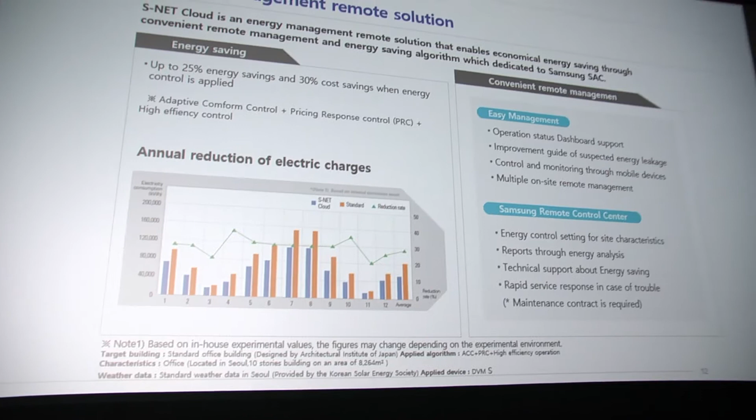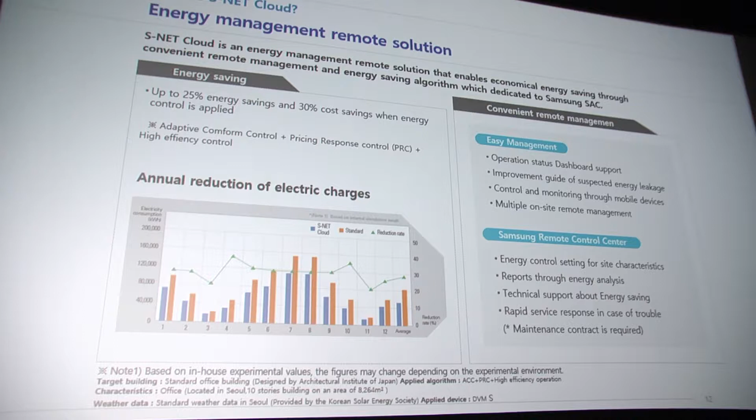What is S-NET Cloud? S-NET Cloud is an energy management remote solution. So you can connect all your Samsung equipment to the system and control the energy they are consuming and monitor it. It can give you up to 25 percent energy savings or 30% cost savings through a whole year. It's an easy management system. You have a simple dashboard which you can operate by just clicking through very easily.

It gives you an improvement guide for where you have energy leakage in your buildings, or gives you control and monitoring by your mobile phone all over the world for your site. And you can put multiple sites in the same system. For instance, if you have a franchise organization or different office buildings, you can put them all in one system. Sorry.

The system will also give you an energy report monthly with your energy consumption through all day, which building is the most energy efficient, which building has some work to do. They will give it to you each month. Also, you will have technical support from our engineers on sites where you can save energy in your buildings.

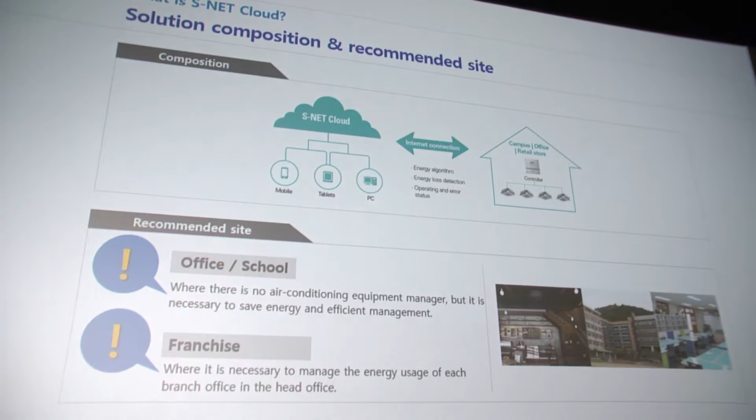What's the purpose? You connect your Samsung system to the internet, and it will directly send the data to S-NET Cloud, and you can reach it through your mobile phone, tablet, or PC at home, at the office, or in other locations. Our main focus is on offices and schools, and franchise organizations like Starbucks or H&M, Zara, those kind of shops. The features of our product.

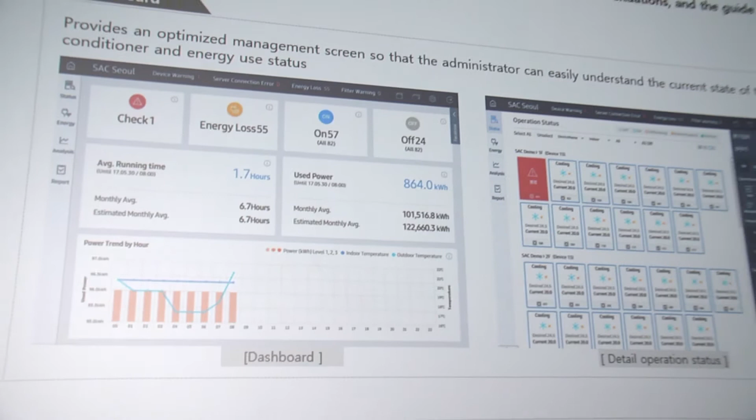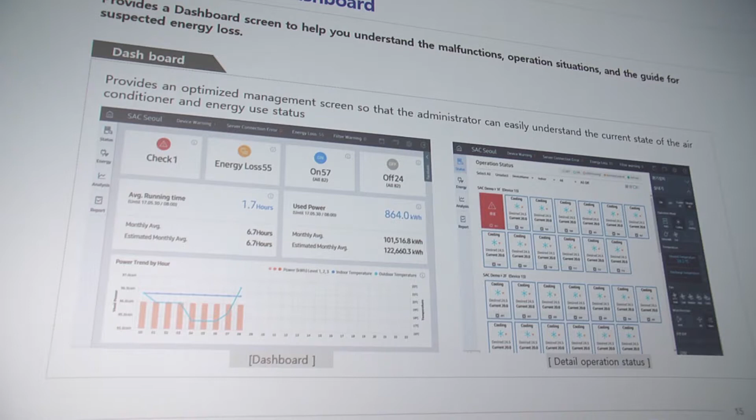This is the dashboard you will see in the remote system. It will give you a quick view where you have to check one of the indoor units which has some problems or a malfunction or failure. It will also give you a view of which indoor units will have energy losses. For instance, it will run for a very long time. Doors and windows will open constantly, and you can check that as well.

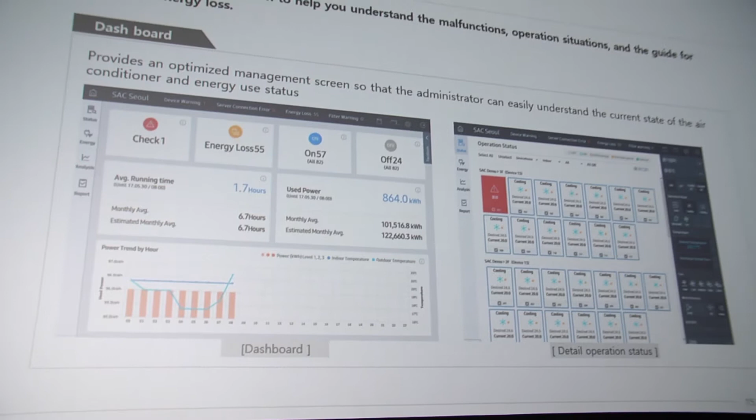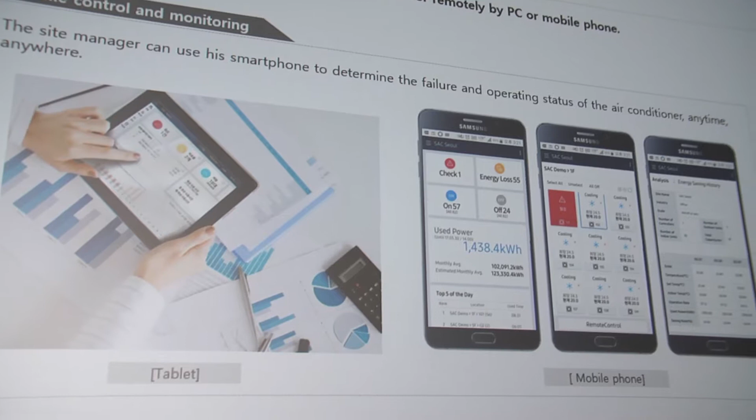You can also see how many units are operating and how many units are offline, so they're not working, they have no demand for them. It just gives you a simple overview, and if you go further on in the program, you will see every indoor unit which is running or is heating, cooling, or in which mode they are. You can also do this by a mobile phone. Probably everybody has got a smartphone these days, and we are providing the system to be working on your smartphone or tablet, and you can check the data from your home if you want to.

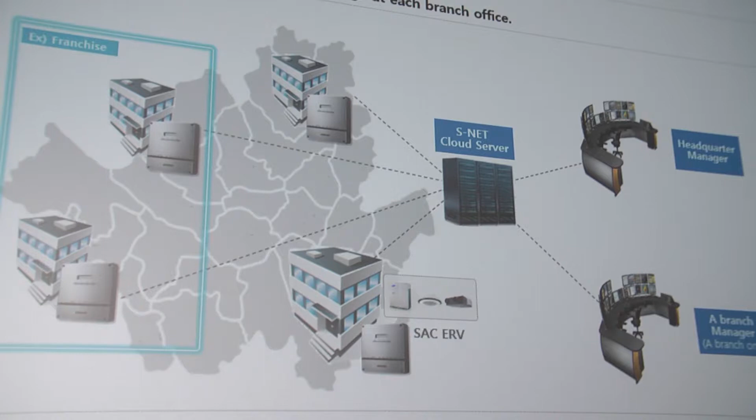The main profit of the system is that you can remotely access every site you have. So you don't have to fly to other countries or other cities to see your system online and how they are performing. And you can adjust from just one site. So if you have a building in 3 different countries and headquarters in another city, you can manage the systems from your headquarters just one click away from your computer or laptop or mobile phone.

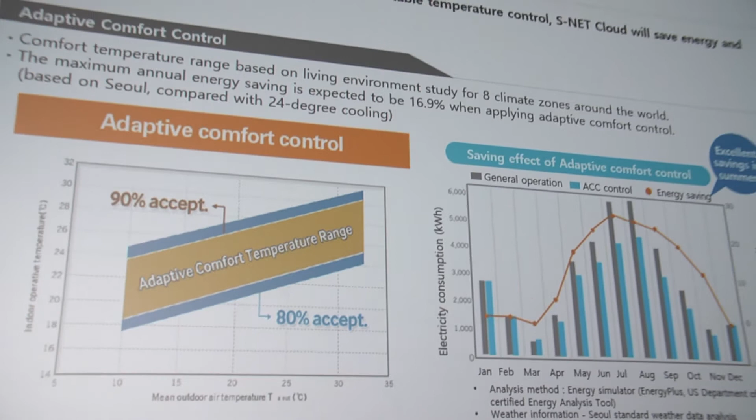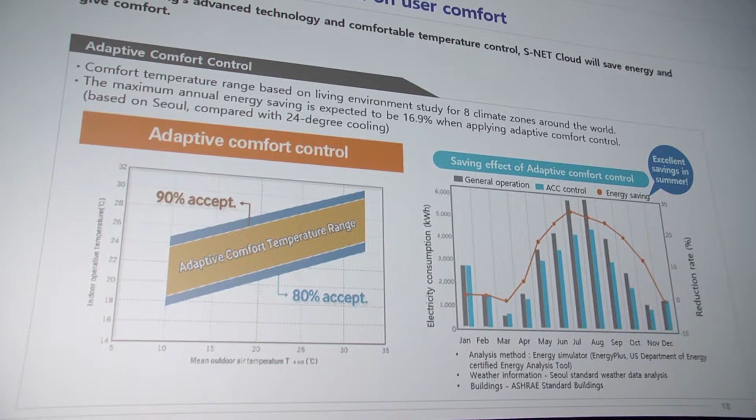The energy savings are based on studies we've done in 8 different climate zones through the world. These comfort zones: when you have a certain outdoor temperature, you have a certain indoor comfort climate in your office building. You can set that up in the system as well to maintain a comfortable climate for your customers, employees, school children, and so on. With this system, you can also provide those energy savings through all the year. In January, February, you don't save a lot, but in the summertime, you can save up to 25%.

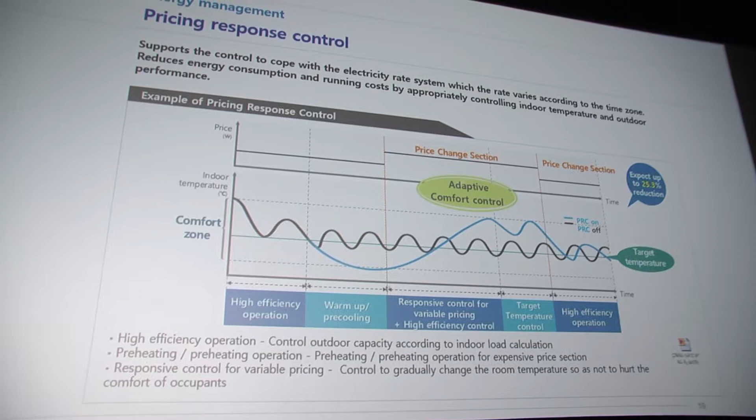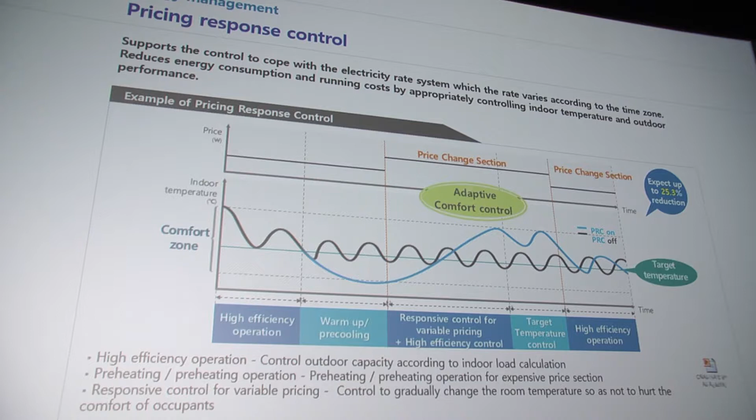This adaptive comfort control, we call it, will have a schedule that will preheat or pre-cool the building prior to working hours or visiting hours, and just let it flow gently through a certain temperature, and then just cool a little bit or heat it a little bit during those office hours, and then let it cool down again at the end of the day.

So for instance, if your shop or building will open at 8 o'clock, we will start preheating or pre-cooling at 7 o'clock in the morning to get a comfortable climate for your employees, customers, and then let the climate rise a little bit. We have a 2 or 3 degree bandwidth to control, and probably around 2 o'clock it will be the warmest time period in the building. Then we will cool it down a little bit, 1 degree, and let it go up to that 1 degree as well, and at the end we will cool down the building, so it will start nice and evenly the next day.

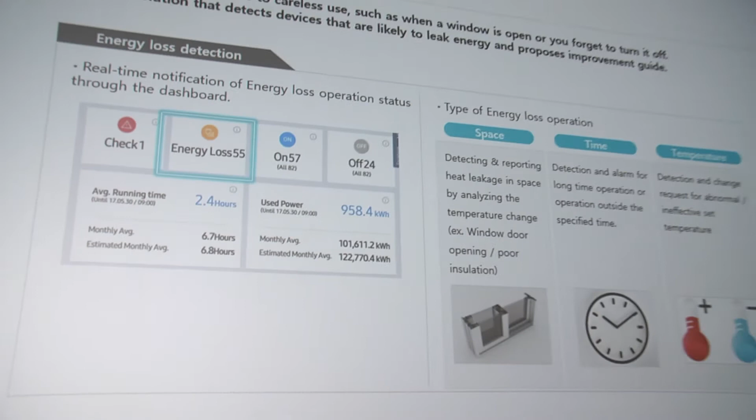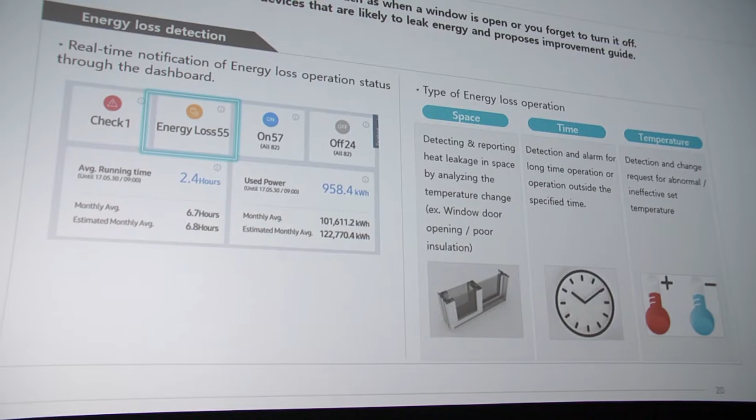In our program you can also see the energy losses which are occurring in the building. The system will detect if there is a heating leakage in the building. For example, a window is opening constantly, or insulation is applied to the building, which our colleagues from Rockwool will talk to you about in some presentations further on. It will give you a report about that.

It will also report about long operation time from some indoor units, so you can check whether that system is not shut off or people are working late every time or whatever. And it will also give you an example of rooms where the temperature is changed quickly all day or changed 100 times each day. So it will give you a report about that.

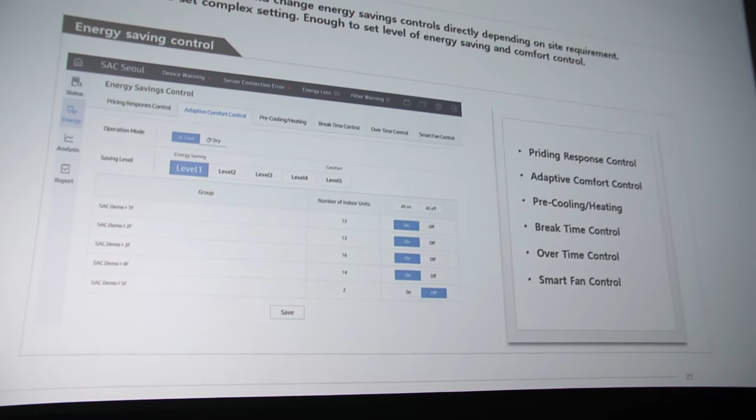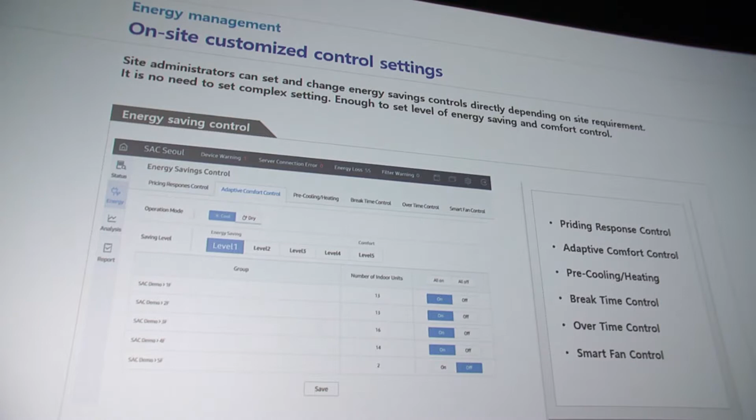In the control settings, you can adjust almost everything which you desire to do. You can change it to pricing response control, adaptive comfort control. If you want pre-cooling or preheating, you can put in the times where you want to preheat your building or cool down your building. If you are in a school, for instance, in the Netherlands we have a 1 hour break for the schools, so you can control that. You can put it in the system, so it will reduce the energy in those hours.

If you have an office building, sometimes you have to work late. You can put in the overtime control. If they press a button, that indoor unit will be running late, but then you can control it. And you can pre-adjust these in this system.

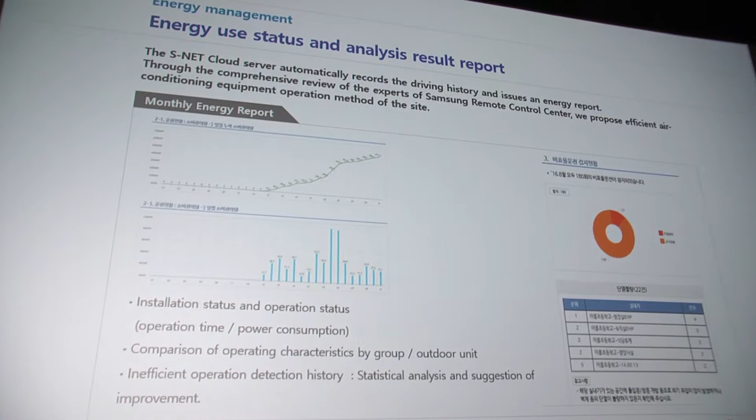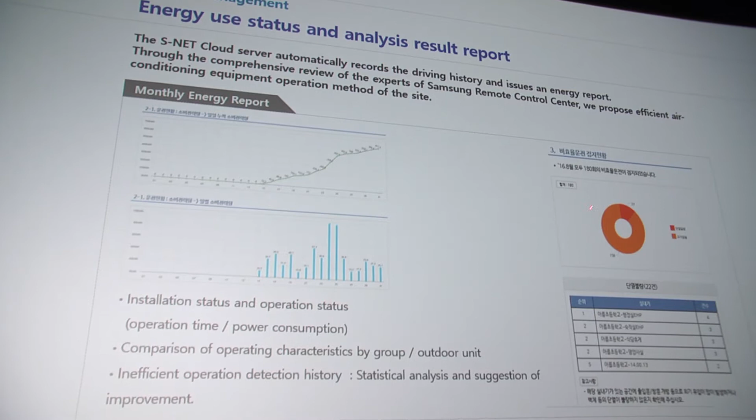Monthly, you will receive a report out of the system with your usage of all your indoor units. It will also give you an example of which indoor unit will be the highest consumer in the system and the lowest. And it will also give you an overview throughout the year of which part of your energy consumption you have reached that year.

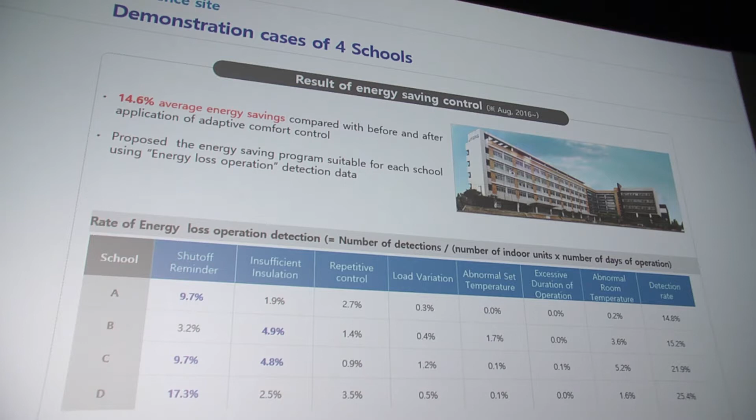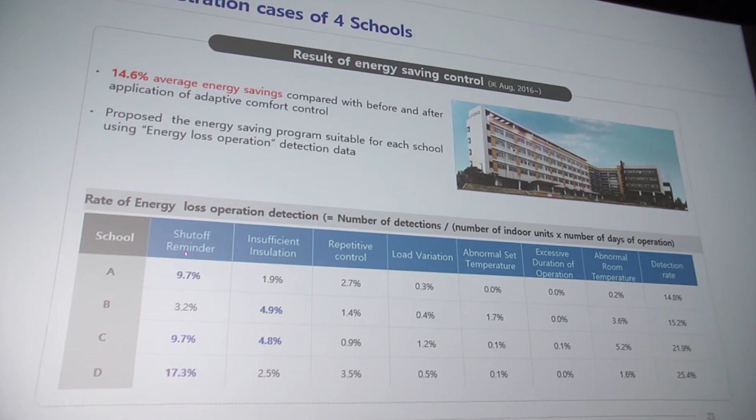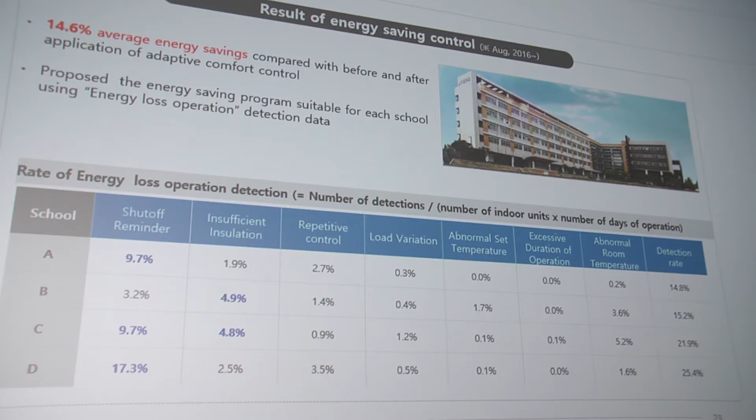We have tested these systems the last year in 4 schools in South Korea. We achieved an average energy saving of 14.6%. That's quite high. The most recognizable thing we found out is that we have reminded people to shut off the air conditioning systems through the day. That was the greatest saving to provide.

Also, you can see the figures. Insulation was in 2 schools not sufficient. Load variation was in school number C quite high. We did something about that. We think that these figures are talking for themselves. But if you have any questions about it, we can provide you the data which is behind these figures.

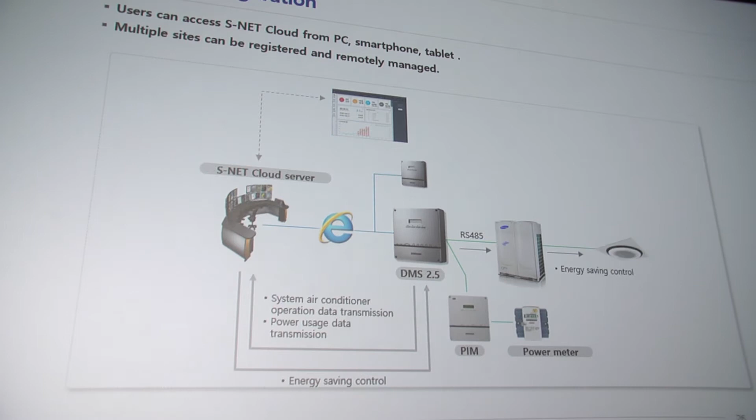The product information. We can provide you this on every Samsung indoor unit we have. You can do it for 1 year or 5 years, depending on the contract you have. That's the model we have chosen for it. You can access it through the internet connection. You should have a DMS system from Samsung and an energy meter and a PIM, which is counting the energy meter.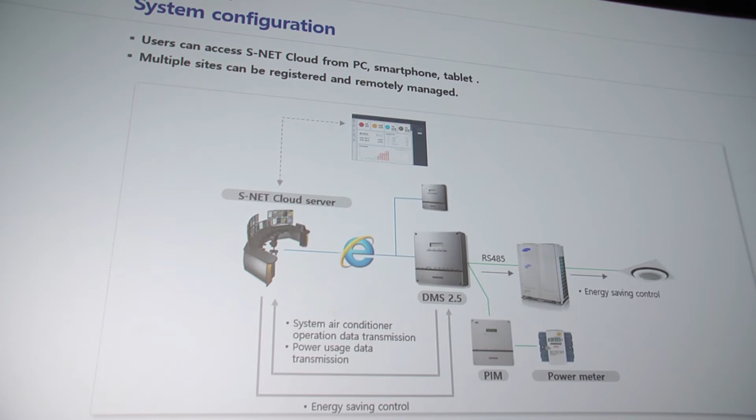Again, if you already have some Samsung products installed in your building, we can provide you with our old system, or if you're building a new building, we can provide you the new language we call NASA. What I wanted to show you is this, but then in real life and with the system we have running.

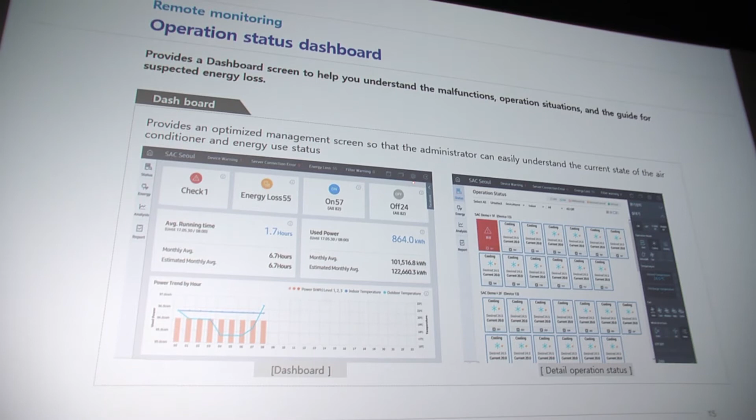On the top right here, you can choose your building. If you have a lot of buildings, you can just go through them on this page. This will be your dashboard you see every time you log in the system. If you want to check every indoor unit you have, you can quickly press on this one. It will give you this screen where every indoor unit is shown, and you can adjust the temperature over here to the preset temperature you want the system to be.

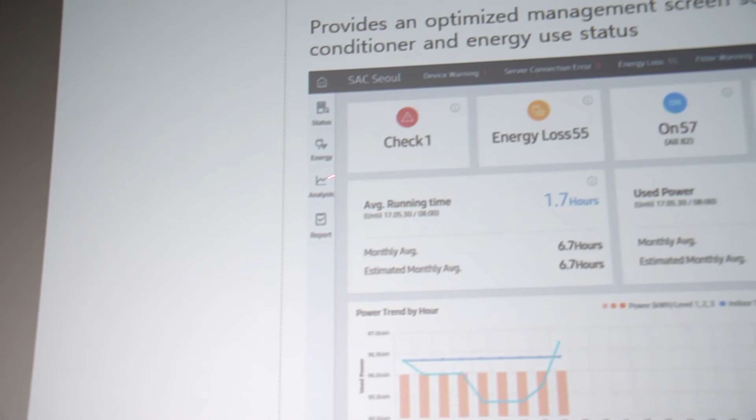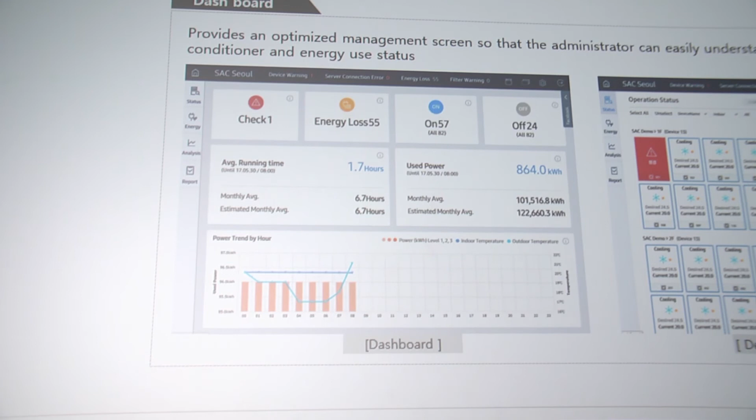You can also just quickly press on energy loss. It will provide you, again, all the indoor units which are having energy losses or energy leakage in the system. At the left side, you will have your energy report. Our engineers use these analytics reports to provide graphs and promotion of energy savings for your products.

And the lowest button here is called report. There you can receive your monthly report. It will provide you a PDF with the status, the energy consumption, the energy which is used, the average, the highest, the lowest, and so on.